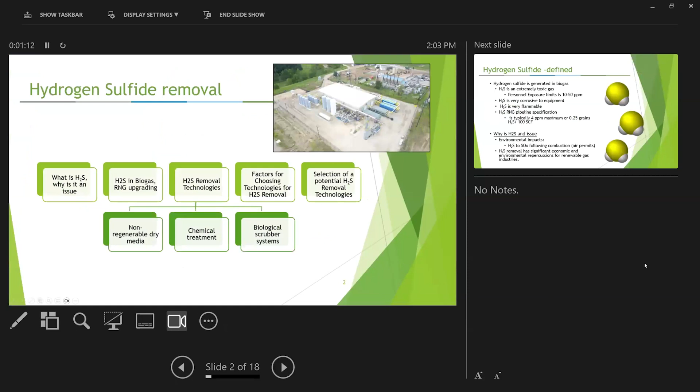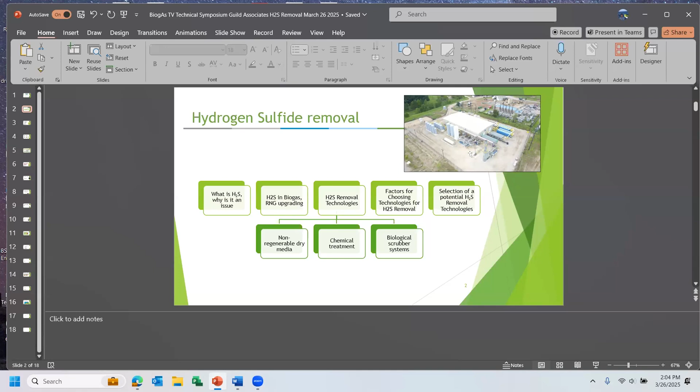So H2S removal, what we're going to be talking about today. First, we're going to define what is H2S. Why is it a problem? We're going to talk about H2S in biogas. What areas do we see H2S in? We'll talk about the main ones, what concentrations, potential technologies for removal. These are going to be broken down into non-regenerable dry media, as well as more complicated systems, chemical treatment, and biological scrubbers. We're then going to talk about factors for choosing the right technology for your applications, and then potentially selection of an H2S removal for your site. So, should be a good one.

So what is H2S? H2S is generated in biogas. It is extremely toxic. TWA exposures for humans on an 8-hour basis are typically right around 10 to 50 ppm. It's also very corrosive. H2S in water in condensed conditions will lead to sulfuric acid. Sulfuric acid will definitely influence the materials of construction for your site. H2S is also very flammable, and it also has strict regulations for pipeline injection. Those are typically 4 ppm.

H2S is also regulated if you're doing biogas power generation on site. These are determined by your Caterpillar engines or similar, and typically range from 100 to 200 ppm inlet. So potentially a need for an H2S solution for that. There's also environmental effects. Byproducts, if not treated with a solid absorbent material or knocked out to elemental form, you have the conversion of H2S to SOx, SO2, SO3 in the thermal oxidizer. So concerns there, you may not even need to treat it, but environmentally, you may need to remove it from your site, depending on state and local regulations.

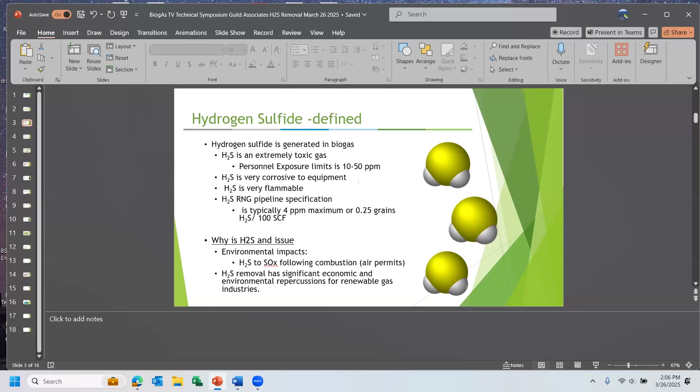And as stated before, it's definitely an economic driver in this business. Depending on how much H2S is being generated on your site, you will have to scrub appropriately. You don't want to scrub more than you need to, but you want to make sure that you are making your product.

All right, so where are we able to find H2S? The majority is found in 2 main areas: anaerobic digestion and landfills. Anaerobic digestion, you're talking about wastewater treatment plants, animal manure collection ponds, and animal and plant byproduct waste as well. In the anaerobic digestion space, the air intrusion is typically very low. So you have very low levels of nitrogen and oxygen, and your H2S is actually quite high. It typically averages right around 2,000 ppm on a statistical basis, but can range from below 500 to 10,000.

Sometimes in anaerobic digestion, they inject ferric chloride or ferric powder, which will limit the amount of H2S being formed in the digester itself, which then has to be removed by another solution before going to an RNG upgrader.

Landfill is a little bit different. The H2S concentrations are typically lower than that of the anaerobic digestion sites. However, you have a lot of other potential contaminants for the H2S absorbent material to work with. These are typically VOCs and siloxanes, and they can vary by site, at different times and in different regions, and as new materials come in, your contaminants may go up and down, including your H2S.

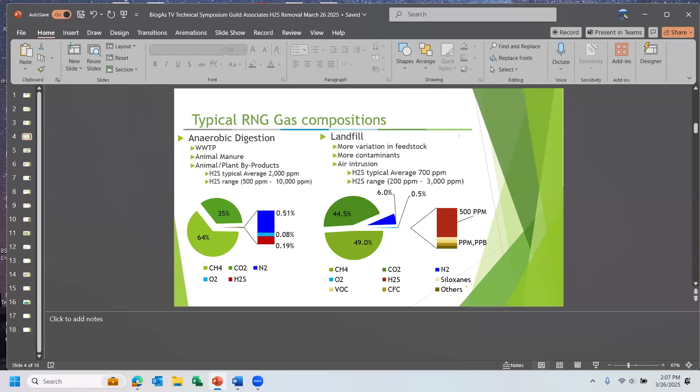So H2S, what systems require H2S upfront for pretreatment for their RNG upgrading? Again, we're typically looking here for methane purification. Methane purification would mean removing the bulk CO2 out of the stream. And this can be done through multiple different technologies: water wash, amine wash, membrane, and PSA. I will state for PSA applications, not always. There are some absorbents out there and systems out there that will absorb H2S and then therefore flare it if that is an option.

Again, some of these other systems may require a precursor for bulk H2S removal, but typically there is an H2S dry media solution downstream of that, just to have something as a polishing bed, or for a material to work in case the bulk removal system is offline. As this document shows here, there's a lot of media out there. There's a lot of solutions out there that require H2S removal upstream.

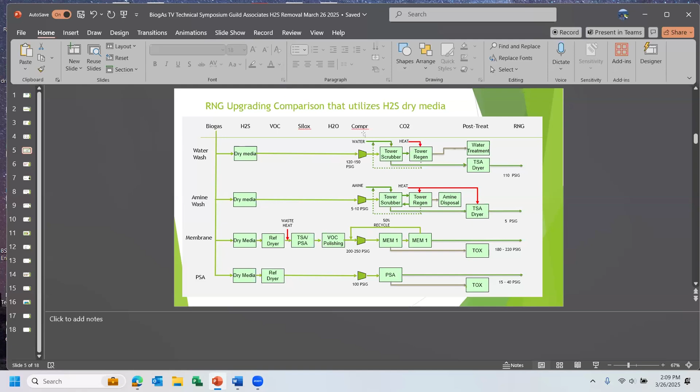Again, removing H2S up front will decrease the cost of material construction, because now you do not need to be stainless steel. You can be carbon steel or coated carbon steel, because you have no risk of sulfuric acid interactions with your material. As you can see for membranes, the amount of pretreatment that is required, VOCs, etc., also limit the effectiveness of the membranes. The last thing you want to do is have H2S carryover into these subsystems.

So again, I've broken down the H2S technology options into what I call dumb systems, and also chemical or biological scrubbers. What is a dumb system? Well, a dumb system is just a vessel that gets filled up with material. At the inlet of the material, you have an H2S laden gas, and at the outlet of the material, you have a gas that is purified of H2S. These are where dry media, non-regenerable dry media, take place.

Now, the term non-regenerable dry media means that it has a service life. The material is going to get replaced out in frequency once it is exhausted. There are materials in there that regenerate in situ, but it will eventually have an exhaustion rate and a service life for the treatment.

You start talking about higher loadings where H2S values are increasingly high in the inlet, and then you start looking at chelate systems and iron caustic scrubbers, and also biological scrubbers as well, in which you are expected to have right around thousands of pounds of H2S inlet per day. These require a technology that makes sense for the application.

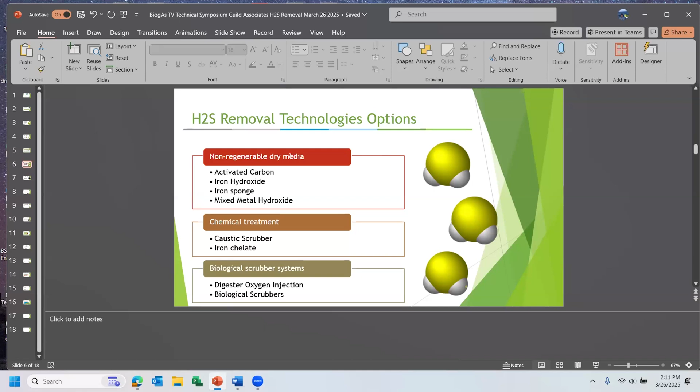So to go on to the non-regenerable dry media first, we're going to first talk about activated carbon. So carbon's been an absorbent for a very long time, and it's naturally suited in the biogas space for removal of compounds, for H2S, for VOCs, and for a multitude of other applications as well. Now, I will state, for this presentation, I did not call out specific carbon manufacturers and carbon products. I just talked about groups or subgroups of the technology, and then a selection can happen within the subgroup.

Carbon is unique because it will have both physical adsorption through the micropores of the interactions with the carbon material, as well as chemical adsorption with impregnants on the carbon to enhance its performance and enhance its life in the operation. Now, these impregnants can potentially walk depending on the amount of water, or they can get blinded by other materials and other compounds. But for the most part, they are very effective as a working group on the carbon material.

Typical impregnants on carbon are iron, zinc, copper, and then you also have the alkaline wash, where you expose the carbon to a sodium hydroxide solution or a potassium iodide solution as well, making the carbon alkaline, therefore able to treat sulfuric acid gas, acid gas in H2S.

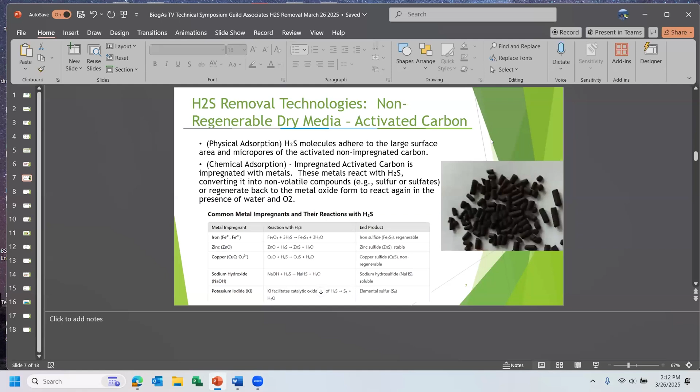Next, we're going to talk about iron hydroxide. Again, this can be an impregnant on a carbon material. It's offered in multiple applications: one as a granular form, as well as a coating. The reaction is very simple. You have iron react with H2S, and you form iron sulfides.

If you have oxygen present in the stream, you potentially have a regeneration reaction if sufficient, where the iron sulfide will then react with the oxygen and water to form your iron oxide material back and elemental sulfur. Elemental sulfur will accumulate in the pores until the material is no longer able to be active. It operates in this absorption, chemoabsorption, oxidation for H2S removal.

Okay. The next one is one that's been in the industry for the longest amount of time, the iron sponge. It's basically another iron impregnated material, typically on a very cheap source of substrate, typically wood chips or an aluminum base. And it's an iron impregnated material, therefore giving you a similar reaction for H2S removal. You have the chemoabsorption reaction and the regeneration, again, when oxygen is present.

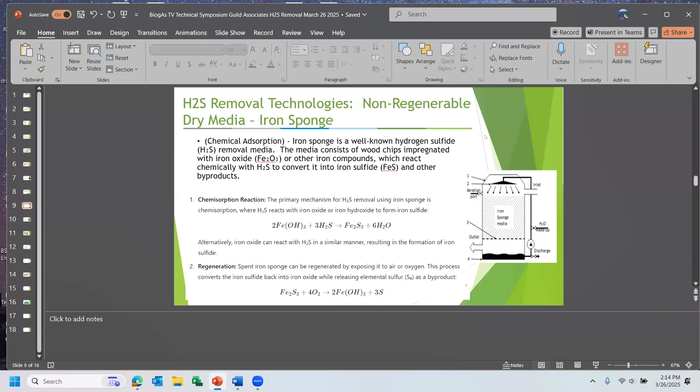And the last technology, and the one I'm most familiar with myself, is the BSR50, which is a mixed metal hydroxide reaction. Here it's not only an iron source material, it is a mixed oxide material with other metals in there to formulate a composition that is, one, reactive, and two, also has a high capacity and high pore space for a mesoporous substrate.

This results in a high end capacity for the material and good utilization, assuming that you have the prereqs of oxygen and water. So, talking to our end users, we put together a slide stating how it works in the operations and what are the good and bad points of each technology in the RNG application. With activated carbon, again, CapEx is typically very low.

These are not complicated vessels. Typically, they're at low pressures. We're talking anywhere from negative on the vacuum stage, or on a positive pressure up to 5 psig, which is typical. The material costs, media costs are typically low. They're on the order of $1 to $5 a pound. And the operational costs, again, you don't need a skilled operator to run a Dräger to understand the input and output or the effectiveness of your material.

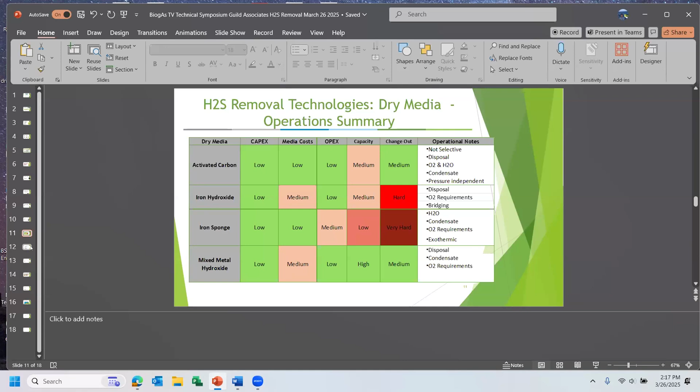Again, I was going to touch on the other chemical treatments. These treatments potentially will have a polishing bed downstream, which would then be a dry media solution, because the operation of such typically requires a skilled laborer to run and operate these systems. This is an iron chelate caustic scrubber. It's a very similar reaction. It depends on just the absorption mechanism for H2S.

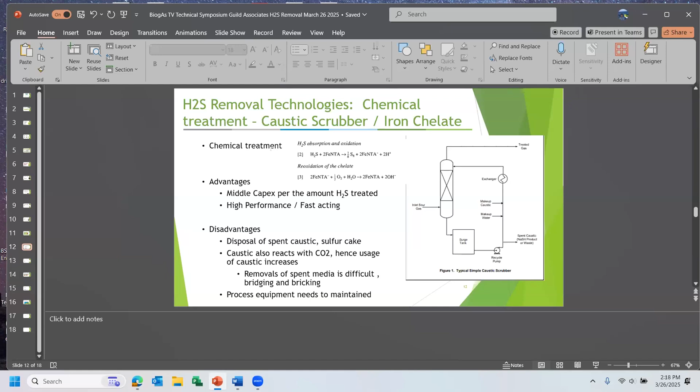You have inlet sour gas coming into your reactor. You have an exchanger, and your caustic or your chelate will be used over time, which then causes another pump to actively measure and pump into the system itself. You will make a spent waste. It's a sulfur cake, and will need to be removed periodically depending on your usage rate of your system. Process equipment needs to be maintained to be viable. So, uptime is definitely a factor.

And for systems that have very large inlet H2S concentrations, you would be looking at a biological scrubber. This would be to remove the H2S compound through microorganisms, basically SOBs, sulfur oxidizing bacteria, converting the sulfur to elemental sulfur. Again, you're going to have the appropriate operations maintain the operation to be effective, and potential downtime and uptime of the plant is dependent on the operations of this system.

Similarly, we polled the user community for the operations of these systems, and the feedback was as expected for replacement and maintaining of that. Again, startup, disposal, maintenance, and temperature were a lot more sophisticated than that of what we call a dumb system, which is just the dry media replacement. But again, utilized for the gas and for the application.

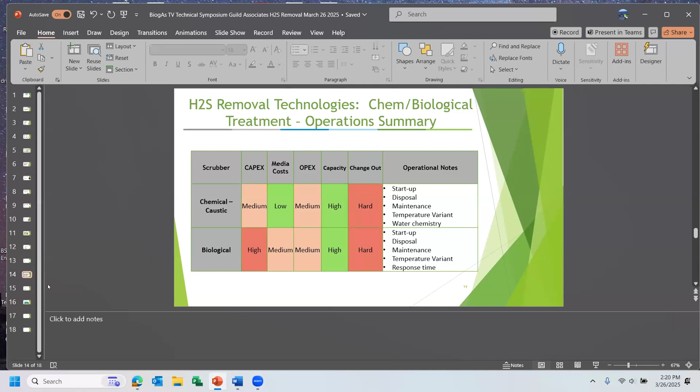All right. So, how do you determine what technology to choose for your application? What makes sense? And so the first thing that I would always recommend is that you calculate how much H2S you're inputting per day. And that can be achieved by utilizing this equation here, which is the fourth point down. And then also understand your operating parameters of your site.

If you're a northern site, will you experience colder temperatures in the winter? Or if you're a southern site, you experience hotter temperatures in the spring and summer. Dry media solutions all have temperature ranges of optimal operation. And being able to operate the majority of your time in that operating range will yield a good solution for you in that regard.

Understand pressure effects. Typically, as stated, the majority of all applications are low pressure. There are high pressure applications as well. At high pressure applications, potentially, you have an interaction with CO2 to form carbonic acid, and that has an interaction on your reactive material.

And then also your water content. Do you have saturated gas? Are you dry gas? I've been around for a while, and it's surprising sometimes. You presume the majority would be saturated gas, but dry gas applications and chilling applications are becoming more frequent, and you need to understand the technology can work in those conditions as well.

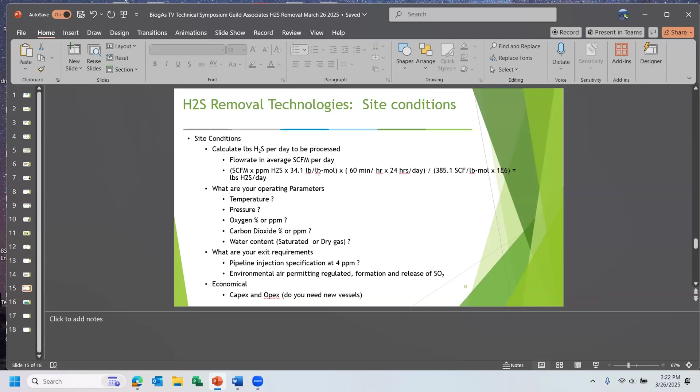So with this information and with the amount of pounds of H2S you have per day, this chart was constructed on an economical basis to yield what technology may be suitable for your application. Now, again, all applications are independent depending on other conditions, pressure, temperature, oxygen, water content, which will move a potential technology further or less depending on your operating conditions. But as you can see, the lower H2S values per day would yield a non-regenerable dry media solution. And as you increase those, you get to a biological scrubber.

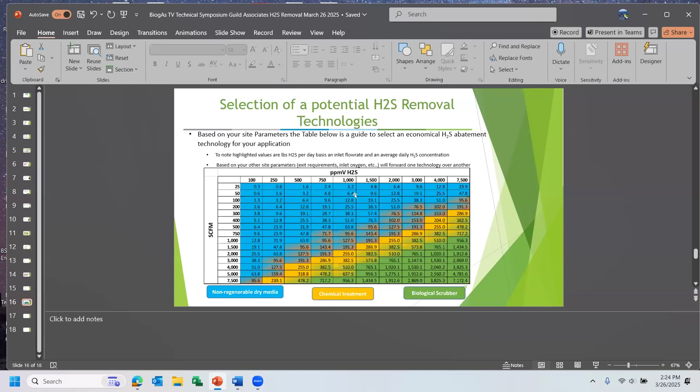And then finally, what are your last variables for CapEx? Are you a new installer or do you have existing vessels? Obviously, if you're able to work with your vessels, you potentially don't have the input of a new cost structure for that, as well as how many changeouts a year, difficulty of changeouts, the amount of H2S inputted, and the overall cost to remove H2S on a yearly basis. This includes the cost of the material, the cost of the equipment to run the material, and the cost of changeouts. So understand those, understand your site.

Are you reliable for flow? Do you have consistent flow? Are you on off? Are you reliable for your oxygen? Do you have a leaky digester where you potentially need to input oxygen to make a solution work? And then also, do you generate a waste? Do you have wastewater treatment options to catch condensate that comes off your material or is a byproduct, and potentially has other contaminants that would need to be properly disposed of?

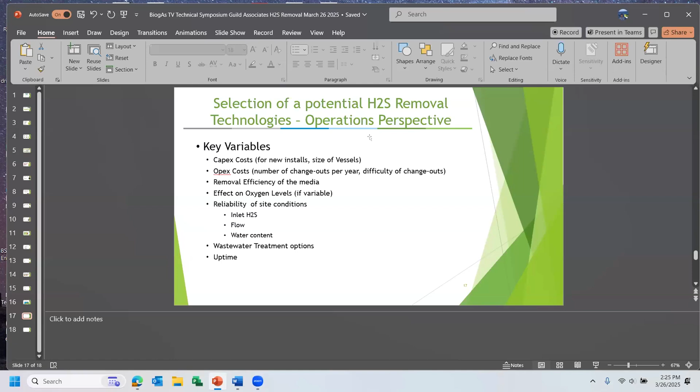So again, appreciate the time today. Wanted to give you some general information on H2S removal and H2S removal technologies, and hopefully provide some input on how things are effective in the application and solutions for the industry.

Great. Thanks, Mike. Good overview. A couple questions came in pertaining to materials of construction. So on things like the absorber vessels or the interconnecting piping, can you comment on stainless steel versus other types of materials for the vessels and the piping?

Yeah, typically, if you have low pressure, the best is always FRP. But that only rates up to 14 psi, so it depends on your site in that regard. Typically, what's used in the industry is a coated carbon steel material, and that is used in the interpiping as well. Other people do stainless steel in that application, but again, depending on how much H2S you have coming in, the amount of potential deterioration effects will be a resulting factor for you.

Okay. So going back to the example you gave where you came up with a 180,000 pound vessel, just walk through how you would size vessels again. Do you say to yourself how frequently you want to change out? Do you say 2 or 3 times per year, and then use your daily consumption?